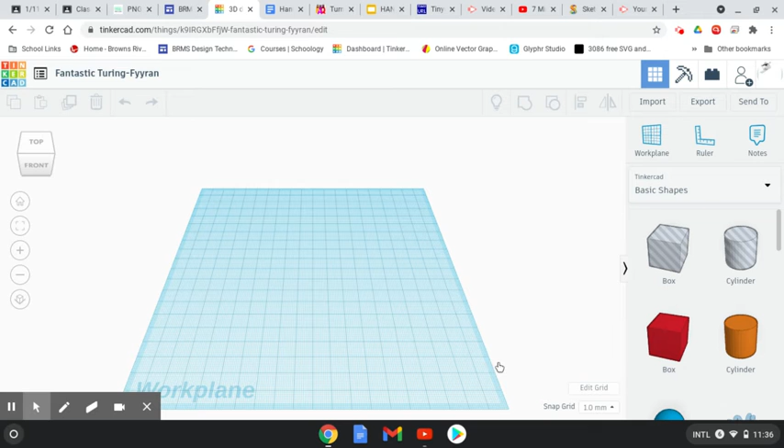Okay, so after you've done all your work in Sketchpad, you've drawn your thing, you've done your generating of your SVG, which we've done before. You're going to go to Tinkercad. We've done this before as well. You're going to import, choose File. Going to look for your SVG image, and when you bring it in, it's probably going to be really, really, really big. So there it is.

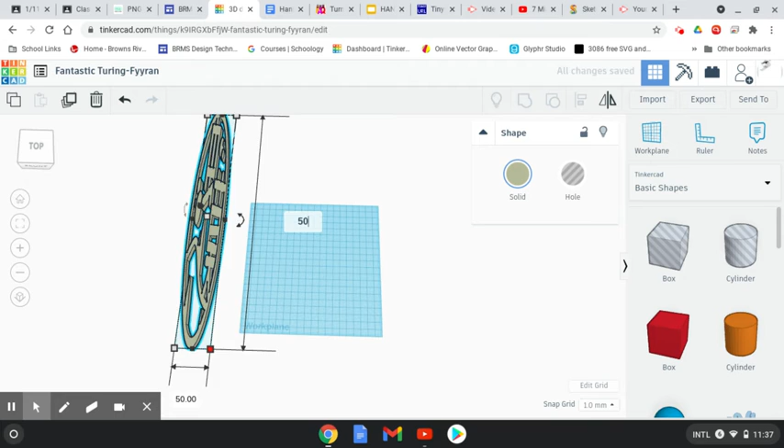So the first thing we need to do is we're going to just resize it real quick, and you're going to click on the corner box, and we're going to type in 50. And if you hit tab on the keyboard, it brings you to the other box, and then you're just going to type in 50, hit enter. Control Z, my bad. There we go. Your Hanko is now 50 millimeters by 50 millimeters. And you're going to click the top box, and it starts as 10, and we're going to make it 6 millimeters tall. So that's sort of the first step.

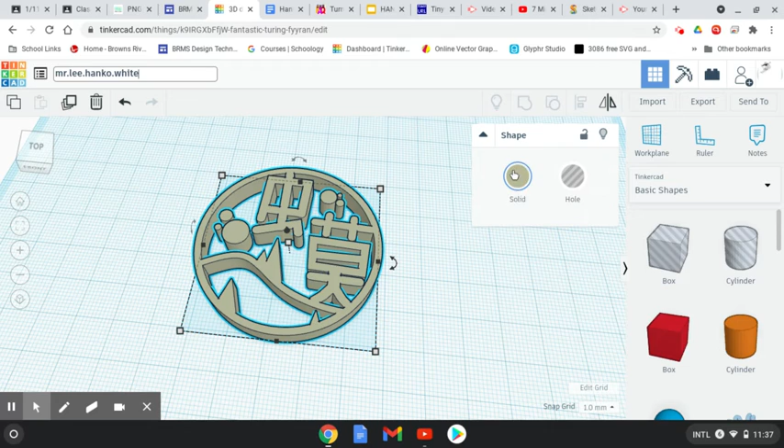And then I'm just going to change the name to Mr. Lee, period, Hanko, period, red, because that's one of the colors I'm going to print in. Actually, I'm going to print mine in white. Perfect. So Mr. Lee Hanko white, and I could actually just turn it white right now. So now it's white on the screen. So that's the first step.

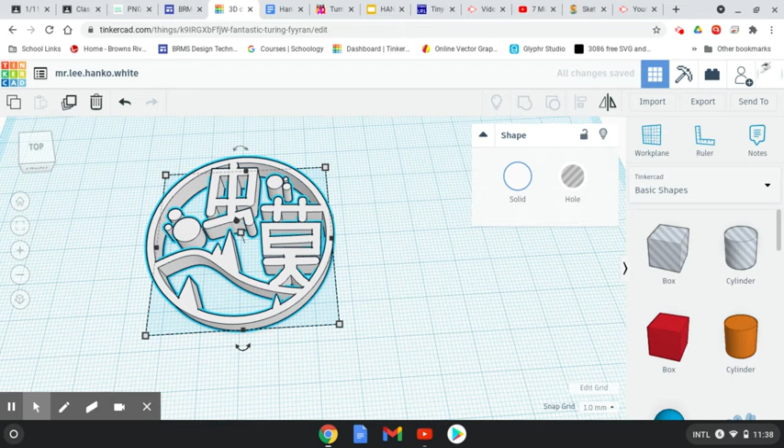So this would be a good place to pause, and then to go back and do that part if you weren't really sure. So pause, go back, do that stuff, and then you can check back if you need to. All right, so I'm going to move on.

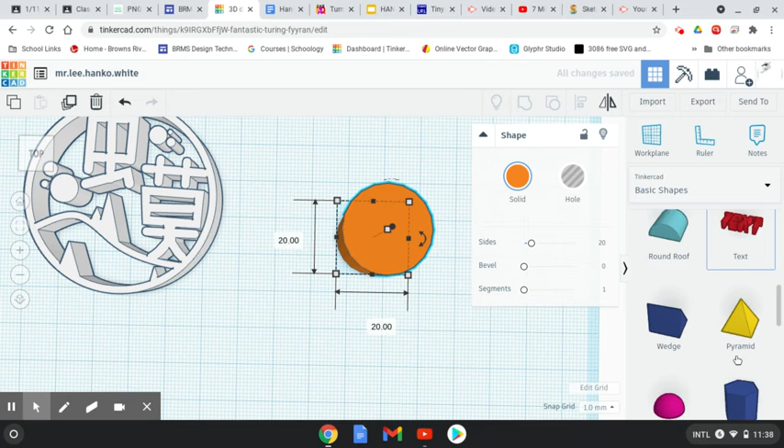So now you have to put a backing on this, so that the pieces that are separate, like these pieces, don't fall away. So the first thing I'm going to do is decide what to use as a backing. I could either use a cylinder as a backing, nice and flat like a pancake, or if you wanted to, you could use a different shape, like a polygon, an octagon, or something like that. So I'll do both of those really quickly.

So the first thing, I'll choose this one. I'm going to bring the sides up to 64 to make it nice and smooth. I'm going to orbit a little bit, and then I'm going to click the top box. I'm going to make this 3 millimeters thick. So I'm just going to type in 3, enter, and while I'm working on this one, I'm going to do the same to here. Make that one 3 millimeters, so you can see the difference.

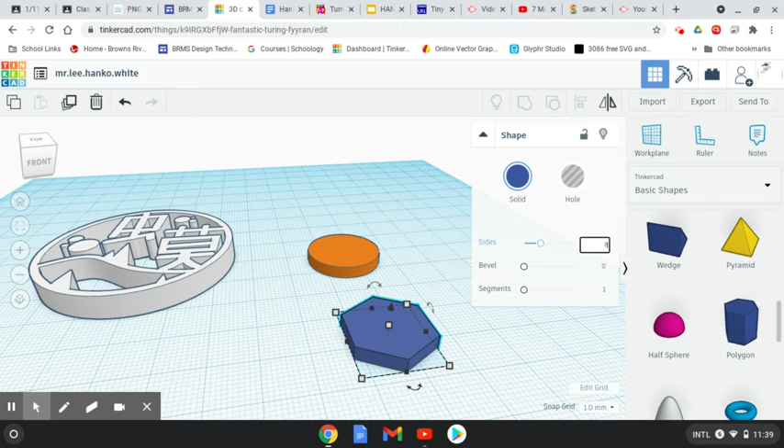And I'm actually going to change the sides of this to an octagon, make it 8 sides. There we go. And since I know that this one is 50 by 50, I'm going to make this one just a little bit bigger than 50 by 50. So I'm going to hit the corner box, and I'm going to make this one like 54 tab by 54. Enter. I'm not sure how big I'm going to make the other one, but I'll do this one first.

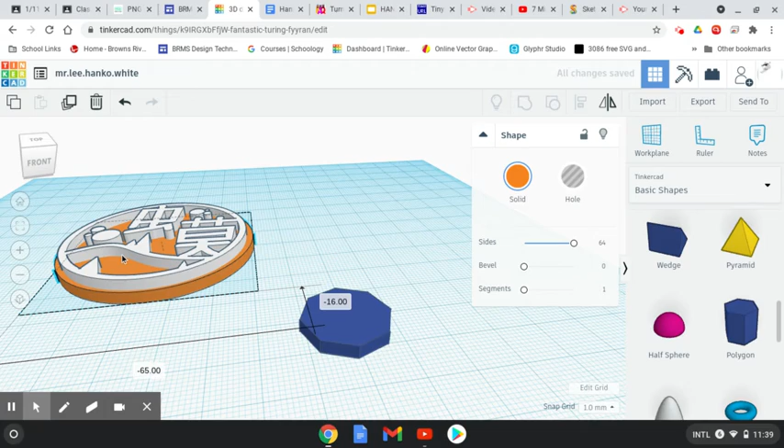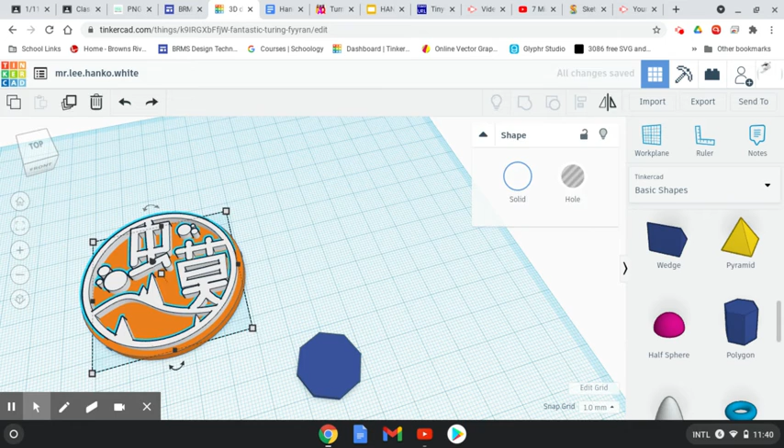And then what I'm going to do is select both of them. Both are selected, 2 shapes. I'm going to use the align tool, and I'm going to align this to the center of that circle. And there you go. And before I group it, I'm just going to duplicate my Hanko. Oh, didn't get it there. Try that again. So Control D, duplicate. There's another one.

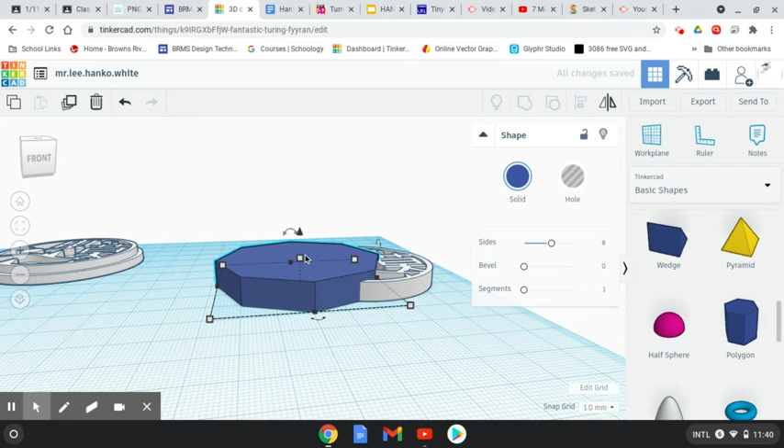And then I'm just going to group this one. There, it turned it white. Perfect. And I'm just going to put that one off to the side there. And then this one, I'm not really sure how big I need to make this. So I'm actually going to hold down Shift on the keyboard. That will make it bigger. I'm going to make this one 3 millimeters thick too. Did not do that. There we go.

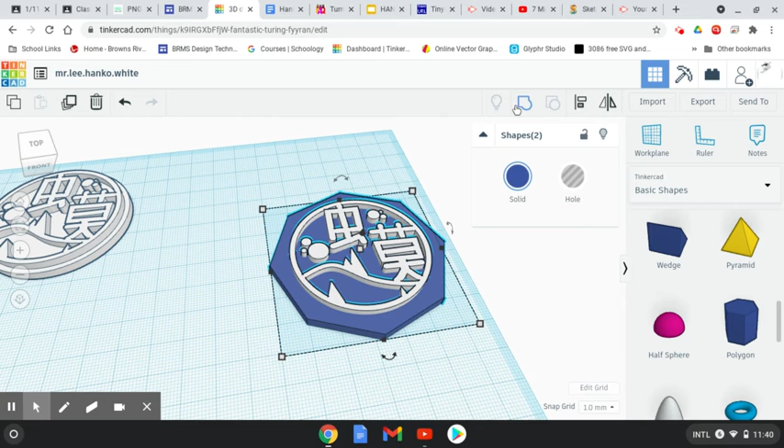And I'm going to hold down Shift still. And basically what I want to do is just make it bigger so that the Hanko fits inside it. And that's not too bad. And then select both, and then use the alignment tool again, and align the Hanko to the center of that shape. And then I'm going to duplicate. I'm going to group it. Oh, let's turn that one white as well. There we go. So you can see 2 different styles.

It just needs to have a backing on it. You can just decide what shape it is you want to put it on. If you want it on a circle, you can make that circle a little bigger. This octagon might be a little too big, but that's okay. It has a nice border on it. Not bad. So I'm going to stop here and then make another screencast for finalizing and finishing up your design.

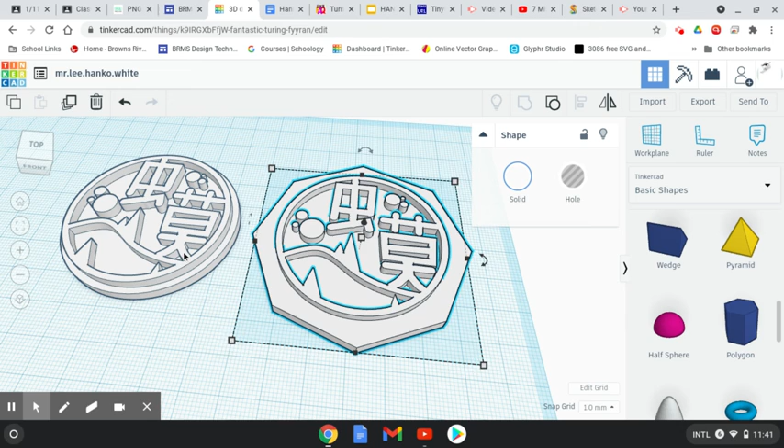So there you go. If you need to go back and watch any of this, you know what to do. Rewind. Good luck.